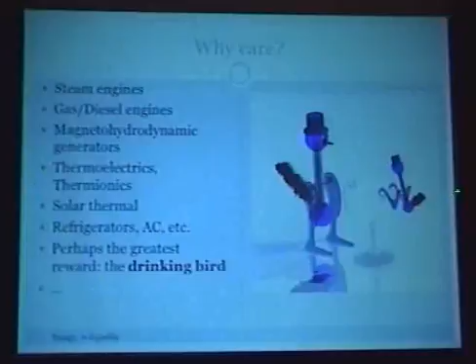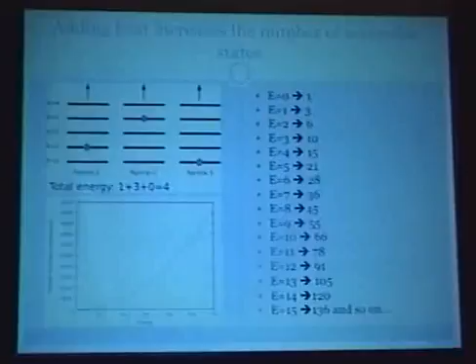For the first few slides, I'd like to review some of the physics I talked about last week and amplify on a few points, redirecting some of those toward the idea of heat engines. As you recall, last lecture I introduced this system of three particles, each with a quantized ladder of energies: 0, 1, 2, 3, 4, and so on. In this particular case, particle 1 has 1, this has 3, that has 0, so the total energy of this state is 4.

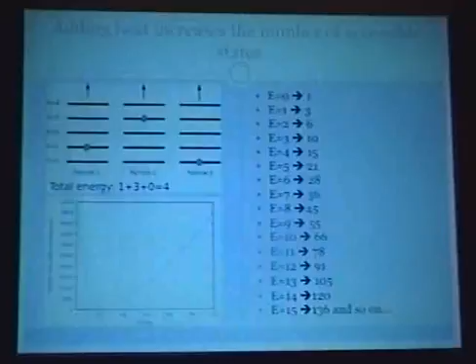Now, what we did last week was distribute different amounts of energy in the system. Recall that if we have 0 energy to distribute, there's only one way to do that, namely that all the particles have 0 energy. If you have 1 unit of energy to distribute, you can put it on particle 1, 2, or 3, so there are 3 different ways to do that. If you have 2 units of energy, there are 6 different ways to distribute it among these 3 particles.

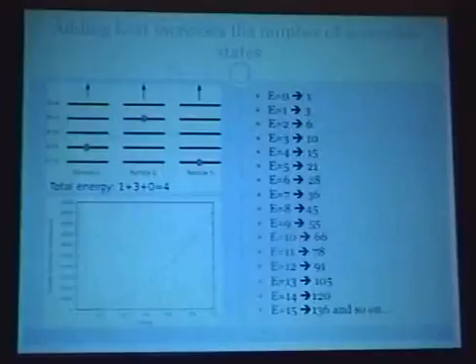You see this very rapidly increases, so that when you have 14 units of energy, you have a large number of combinations to distribute across. If you plot this up to higher energies, you see that at 200 units, you have something like 20,000 different combinations with which you can distribute the energy.

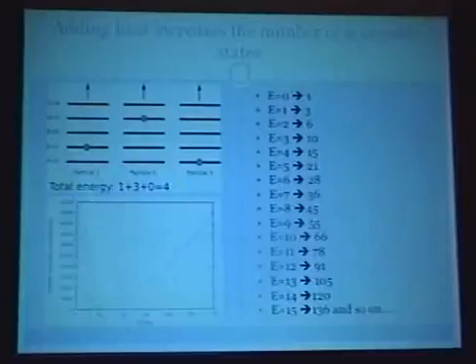So this was just 3 particles, but now imagine some of the quantities in this room, like 10 to the 23 particles in some volume of air, and macroscopic amounts of energy—you can see you're really dealing with a vast number of combinations.

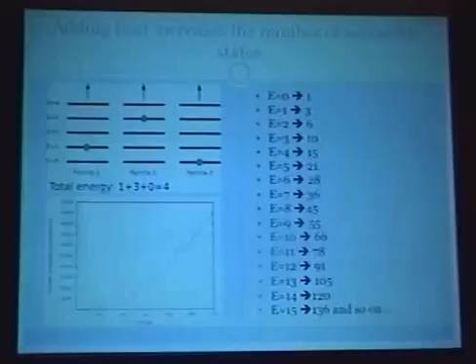So the way we count those combinations is this quantity I introduced in the last lecture, entropy, which is just a proportionality constant times the log of the number of those accessible states.

A natural question to ask: when you add energy, you increase the number of accessible states, so you're increasing the entropy of this little system. You can ask that question more generally with thermodynamic systems like a volume of air. As I explained last week, the relation between the amount of heat you add and the change in the number of accessible states is given by this proportionality constant, the temperature. So you might think of temperature as being a real thing—something feels hot, something feels cold—but it also tells you how to relate a given amount of heat over a temperature to the number of accessible states you add to a system.

This was all a little abstract, but we can think about it in a practical setting. Here we have some ice water in a hot room—the room's hot, the ice is cold. As I said last week, if you have a gradient in temperature, generically you get a current of some type, in this case a flow of heat until the two temperatures match. So you know that if water sits out long enough, its temperature will match the room's temperature.

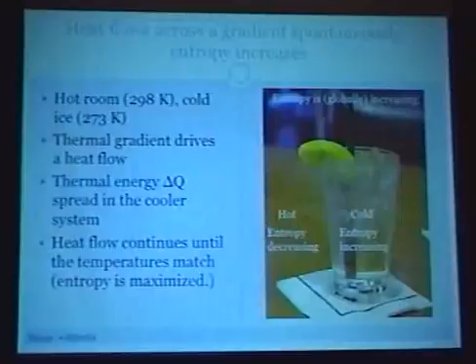And in the process, some heat delta Q has flowed from the room into the water. So we can now think about this more quantitatively in terms of that thermodynamic entropy. Recall that the change in entropy is the amount of heat you add divided by, in this case, the fixed temperature. That's a critical point, that the ice is at a fixed temperature.

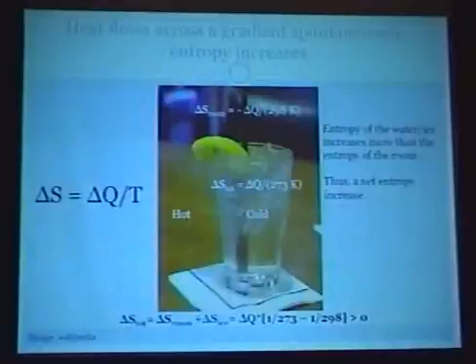So if you look at the room, if you add some delta, you're taking some heat away from the room at its temperature, so its entropy is decreasing. If you're used to thinking about entropy always increasing, this might be somewhat of a surprise, but that's because it's giving up heat.

But then, if you look at the ice water, that heat is flowing into the water at 273 Kelvin. 298 is 77 Fahrenheit, so that's like this room. 273 is 32 Fahrenheit. So the heat is flowing into the ice water, and the entropy increase there is that same amount of heat over 273.

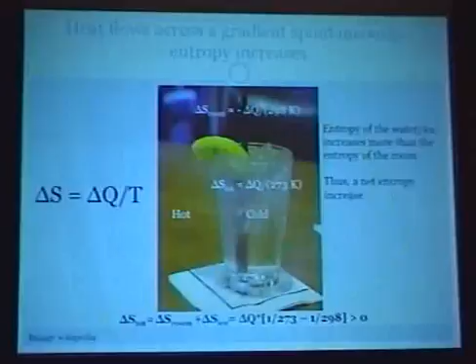So when you think about the system as a whole, the total change in entropy of the room, which is decreasing, and the total increase in entropy of the ice water - you find that because 1 over 273 is bigger than 1 over 298, the change in entropy is greater than 0. So in particular, the entropy of this universe is increasing.

So we can elevate this to a law, the entropy statement of the second law of thermodynamics, which says that in a spontaneous process, entropy is increasing. The schematic here is just like what I showed: if you have hot and cold, heat will flow between them. Entropy will increase until it reaches a maximum, and then you're at some thermal equilibrium, and nothing happens.

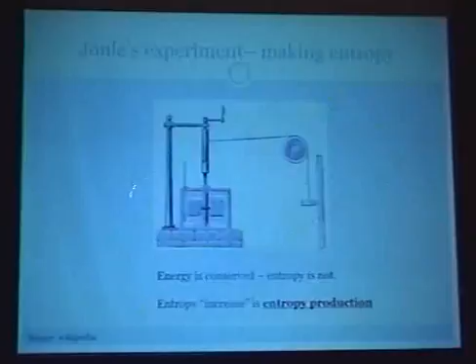So this slide highlights an important difference between those. Going back to Joule's apparatus, he showed that the potential energy embodied in this mass when it falls is converted into heat in the water in these paddles, so that the energy is conserved. The mechanical energy of this falling mass is converted wholly into heat energy.

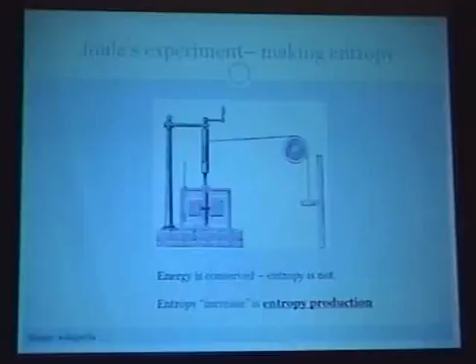But the critical point here is that the entropy is not conserved. In the view of entropy, you're adding heat to this water, so you're increasing the entropy in this volume. So while momentum and energy are conserved, entropy, even though it's a property of the stuff, is not.

And when the second law says it's increasing, perhaps a better verb for that is production. That is, when you add heat to something, you're producing entropy.

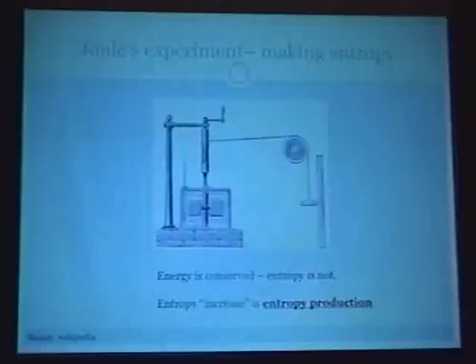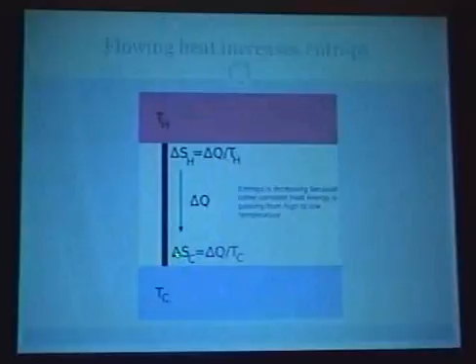So if we think about the ice water in the room a little bit more abstractly: here's the hot room, some T hot, and here's the cold ice water, T cold. There's some heat flowing through the glass, in this case represented by this rod. There's some change in entropy of the room, which is the heat over the temperature of the room, and there's some change of entropy of the ice water, which is the heat over the temperature of the ice water.

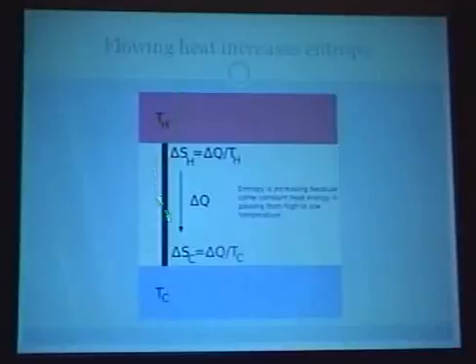Now, the second law of thermodynamics only says that entropy has to increase, but it doesn't tell you how quickly or to what extent. So, in particular, you might imagine that you could siphon off some of this heat and do some useful work with it in such a way that the entropy of the whole system still increases, but just less than in this particular case. That's the basic idea of a heat engine.

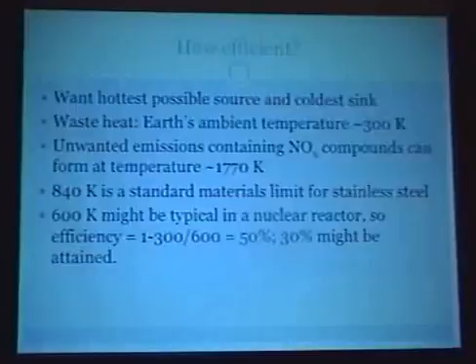Oh, you will? So I just want to drive home the point about these heat engines. We can elevate these observations to another form of the second law of thermodynamics, which says that a cyclic engine cannot convert thermal energy into mechanical energy unless the device uses two temperatures and discards heat to the cold side. In particular, it can't be 100% efficient.

Another aspect of this is that the fact that entropy has to increase puts an upper bound on how efficient that engine can be. So the picture to have in your head is that you can have something like this, where heat flows through some engine to produce work, going up the cold side.

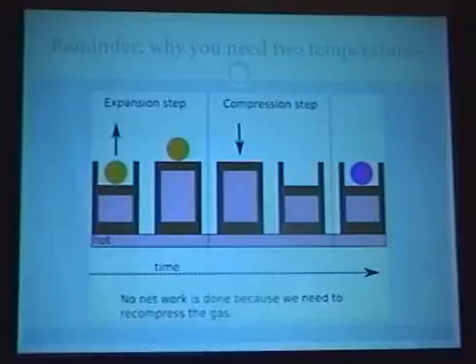But you can't just take heat from a hot side and produce mechanical work with it. So I just want to review a slide related to what I talked about last week, which reminds you why it is that you have to have two temperatures. So if you just had one temperature, let's think about this system.

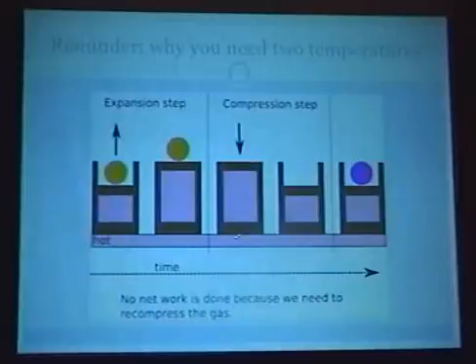You have a cylinder, a piston, and a mass. The idea is that you have this hot plate and heat is flowing in isothermally, causing this piston to rise and doing useful mechanical work. But the point was, if you want to continue to do work, you have to reset this piston back down and then put a new ball on, like we do over here.

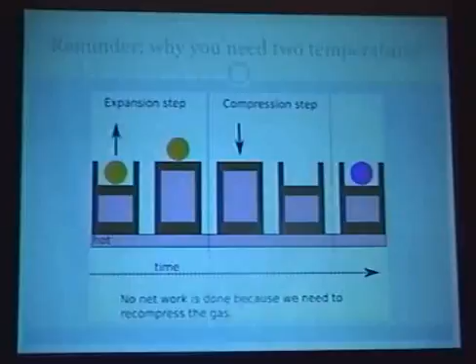If you only have one temperature, you'd find that to recompress that gas at the same temperature would take the same amount of work you just got out of it. So if you ran this as a cycle, you wouldn't get any net mechanical work. The idea is you really need to have two temperatures, and then compress at the lower temperature.

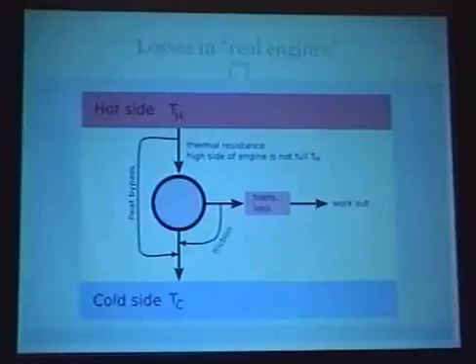Obviously, if you make mechanical work here, like turning some axle, you can have friction, and that friction is dissipated as heat, which again just flows to the cold side. That's entropy that you're producing, so again you're losing efficiency.

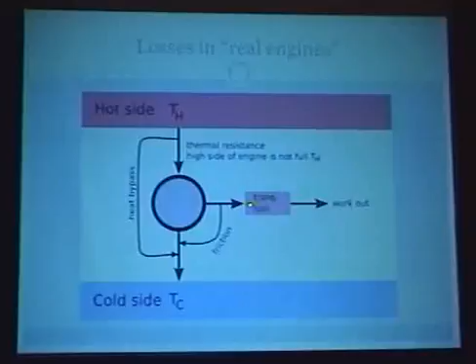You can also have things like thermal resistance, so that the temperature on the hot side of this engine is actually less than the heat exchange you're able to access, and that reduces the efficiency. You also have things like transmitting the mechanical power, mechanical losses, and eventually you get some work out. So you can see why that nuclear reactor wasn't able to achieve its 50% Carnot efficiency, but instead achieved more like 30%.

If you operate between two temperatures, a common type of engine is a jet turbine, which likes a very hot high-side temperature, and it rejects gas at still very high temperatures. The jet engine likes to work in a high regime, whereas a steam turbine might like more intermediate temperatures and reject to something like river water, room temperature.

So the idea is that even if these engines are restricted between two temperatures, you can combine two of them in a scheme where the rejected heat from one flows into a lower temperature engine, and you can exploit a much wider temperature change.

If you're interested in more discussion and some derivation, I put more technical detail in the notes. But the upshot is that there's a total efficiency for this combined cycle, which is the efficiency of the top guy plus the efficiency of the bottom one, minus the product of the two.

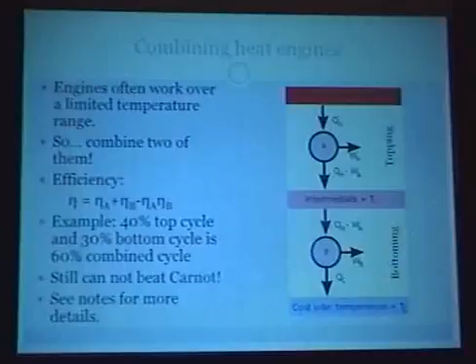To put some numbers to this: if the top guy is 40% efficient, which is pretty typical for a gas turbine, and the bottom guy is 30% efficient, then when you plug those numbers in, you find that this combined cycle can reach 60% efficiency. So combining these things is really a very reasonable thing to do.

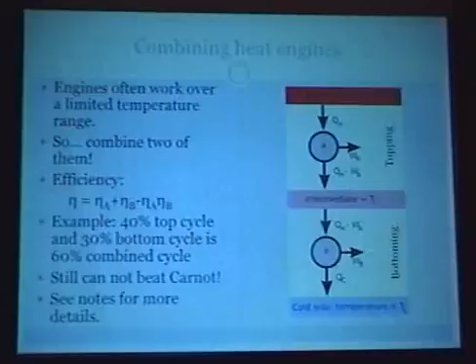You might think this sounds so good that you could possibly beat Carnot's efficiency. But it's still the case that if you could build an engine from this hot temperature to this cold temperature, the Carnot efficiency would be the highest you could achieve. So even if you combine a bunch of these motors and get the impression you're getting a better deal, you still can't beat Carnot. There's more discussion of that in the notes.

Here's a typical engine you might use in one of these plants: 330 megawatts, and it's about 40% efficient, as I mentioned. This is the jet engine that turns the generator, just like the generator we talked about in the second and third lectures. Then the heat you reject can be used in a secondary steam cycle, again just like the generators I talked about in the second lecture.

You see that the hot side of this jet turbine is quite high, and the steam turbine is the one that starts out at this rejected heat.

There are also more exotic schemes that use magnetohydrodynamic generators as the topping cycle and steam as the bottoming cycle. I think this type of thing is a really neat idea.

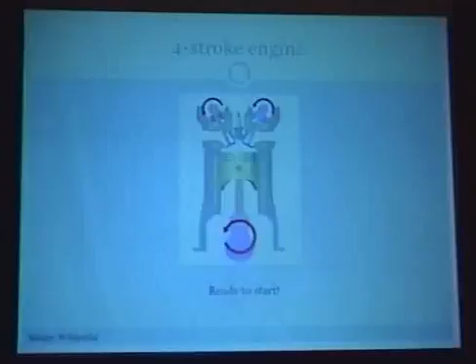For the rest of the lecture, I'm going to move on to transportation engines and statistics about transportation. Let's go through the steps of how a standard gasoline engine works. So it's ready to start.

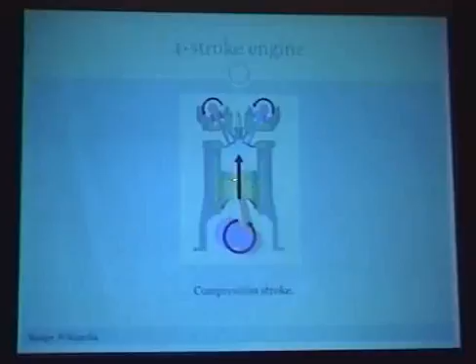In the first intake stroke, this valve opens and an air-fuel mixture is introduced by pulling the piston down into the cylinder - this is called the intake stroke. Then as this continues to turn and drives the piston back up, this valve closes and compresses that air-fuel mixture - this is called the compression stroke.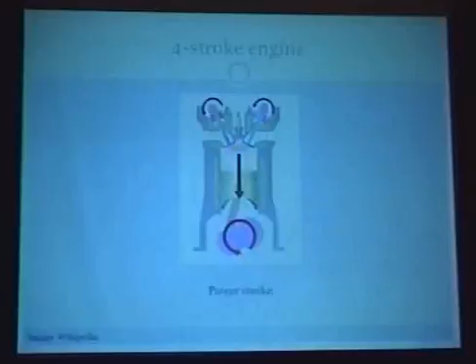Now it'll reach this top point, and that's as high as this piston will go, and the spark plug ignites that pressurized mixture. The pressure very rapidly rises at sort of a constant volume. And you can imagine what happens next: you get the so-called power stroke, and that drives the piston back down.

This is the one that you exploit with the car. Then in a final stroke, the piston rises again, but this valve opens and lets the exhaust escape.

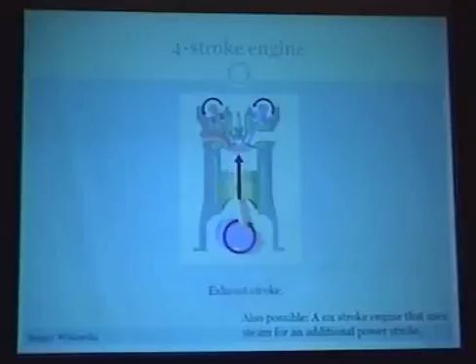An audience member pointed out last week that you can also think about six-stroke engines. I won't, because of time, have a lot to say about that, but the basic idea is that you can use steam as an additional stroke here and exploit the remaining heat.

Let's just call that quantity R. I have more of a derivation in the notes if you'd like to see the technical details, but you find that in an idealized treatment of this Otto engine, the efficiency is 1 minus the compression ratio to this neat factor, gamma, which is called the adiabatic index of the gas.

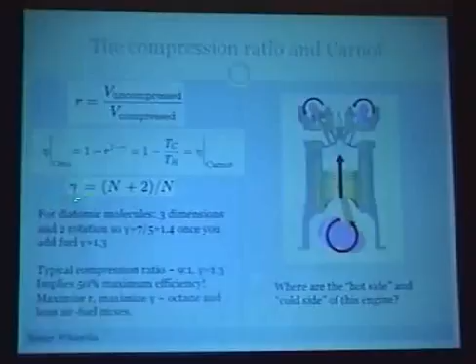Now, to go into why that's the case, it's pretty subtle, but what the adiabatic index is, is the number of degrees of freedom in a gas plus 2, divided by the number of degrees of freedom.

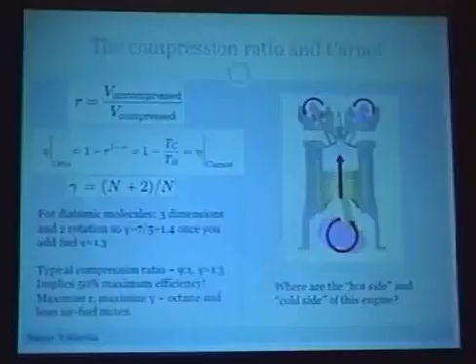So what are the degrees of freedom? If you have just one molecule or atom running around, it can move in 3 dimensions, so that's 3 degrees of freedom. If you have a molecule, it can also rotate, and to describe that you need 2 additional degrees of freedom. So a molecule like N2 or O2 can have 5 degrees of freedom.

So if you plug that into this index, you find that the index is 1.4, or 7/5. Now once you add fuel, you lower that index by increasing the number of degrees of freedom to something more like 1.3.

So now we can estimate how efficient some real engines are. A typical compression ratio in a modern engine might be something like 9 to 1, although that can vary, and the adiabatic index might be something like 1.3. If you plug that into this equation, there's the compression ratio, there's the adiabatic index, you find that implies you can reach something about like 50% efficiency.

So it turns out that this compression ratio is really a good proxy. If you work out the details, it's a good proxy for a cold to hot side temperature ratio, which does reach the Carnot limit. So when people talk about compression ratio, it's really kind of a proxy for what people talk about in other engines with these temperature ratios.

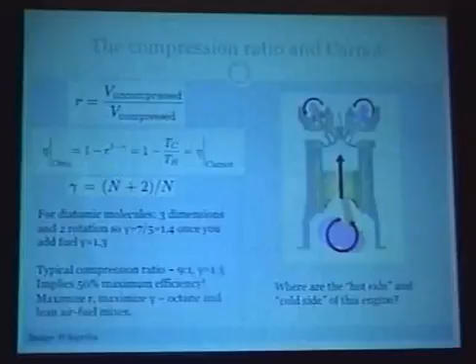So if you want to maximize the efficiency, what do you do? Well, you want this compression ratio to be as big as possible, and you want the adiabatic index to be as big as possible.

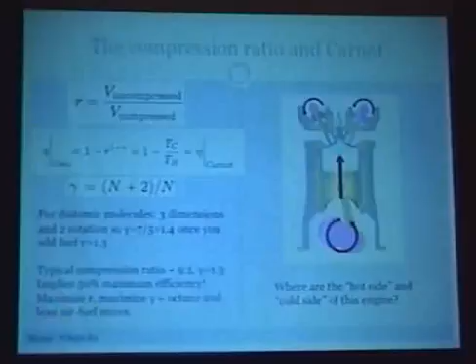So the way you maximize the compression ratio is to compress the gas more. But to do that, you need to have a higher octane air-fuel mixture, because the octane is what determines how much you can compress the gas before it spontaneously ignites. You really want that gas to ignite with a spark plug in sync with the engine rather than spontaneously. So having a high octane allows you to have a good compression ratio.

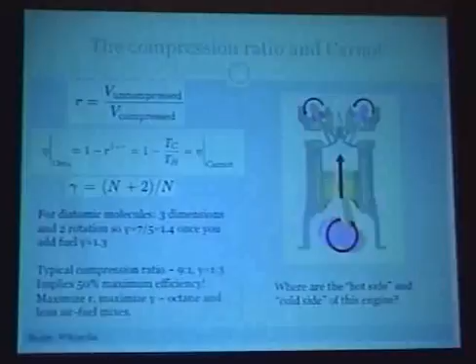To maximize the adiabatic index, one thing you can do is have a lean air-fuel mixture. That is, you can have more air than fuel, and it brings you closer to this 1.4 adiabatic index compared to 1.3.

Okay, so I think now we have a pretty good sense of the efficiencies of some real engines and the terms that go into them. We can do a kind of back-of-the-envelope calculation to try to anticipate, say, what the fuel economy of a real car is. How can we understand our real cars?

So to think about that, let's think about a really simple and stupid car, which is a sphere. And this is my other car.

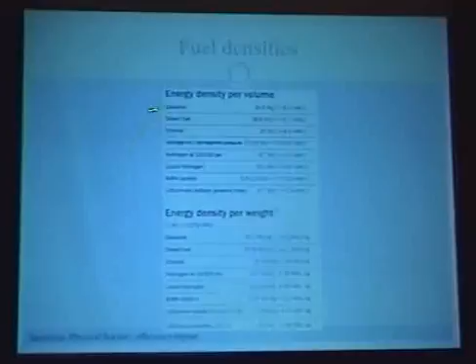So first let's think of how we want to power the sphere. Well, what are the options? You can use the gasoline engine, the diesel engine, ethanol, hydrogen, nickel metal hydride batteries, lithium-ion batteries.

And you'll note here, sorry this is a little bit small if it's hard to read, that the energy density of gasoline is really one of the highest, at about 35 megajoules per liter. If you compare that to current batteries, you see that batteries really embody much less energy.

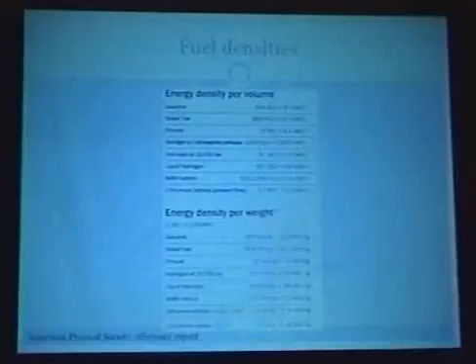So for this car, let's be a little bit old-fashioned and use a gasoline engine. This table was from the American Physical Society report, and there's really good discussion of future batteries and improvements.

Okay, so just to put that in another set of units that might be more convenient, imperial units, gasoline embodies 114 BTU per gallon, 114,000 BTU per gallon. Recall that a BTU is the amount of heat required to raise a pound of water one degree Fahrenheit.

Okay, so the first thing we want to calculate is how much power an engine produces, its primary power. So if you know how many BTUs per gallon, and you know how many miles per gallon your fuel economy is, you can find how many BTUs per mile your car needs to move you. If you know how fast you're going, that is, how many miles per hour, you can find how much energy per time, like joules per time, your car needs to move you at a given speed.

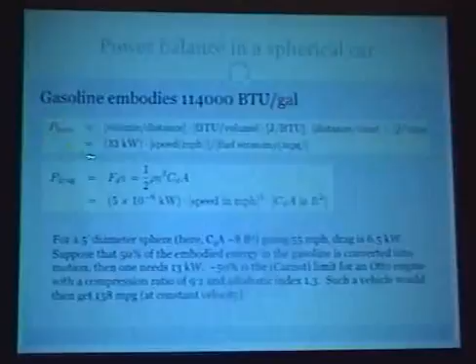And just to put some numbers to that, that burn rate power is about 33 kilowatts times your speed in miles per hour, divided by the fuel economy. So if you're going 55 miles per hour in a car that gets 30 miles per gallon, this comes out to about 60 kilowatts. So that's about 1,000 60-watt light bulbs. It's really a significant amount of heat energy.

So where's that energy going? Well, obviously it's going into the motion of the car somehow. Why do you need power to make a car move? Well, obviously to accelerate it, but also once it's moving, you're subject to drag from the rolling resistance in the tires, and you're subject to drag from the air.

So for the spherical car, let's just say we only have drag from the air. The sphere is trying to move through the air, and there's some drag term. From the lecture on the wind, we reasoned that the drag force from wind blowing on some surface scales as the density of the air times the velocity squared, times the coefficient of drag, times the area. But when you want the power, you multiply by the velocity, so the power from drag of moving the sphere through the air scales as the velocity cubed.

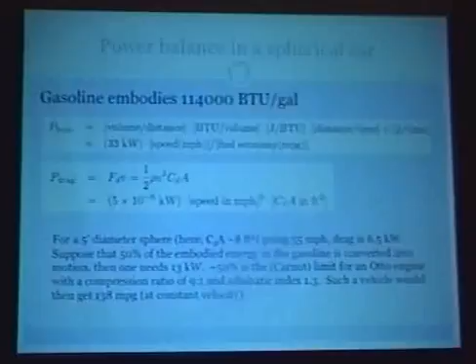So to put some numbers to that, this is 5 times 10 to the minus 6 kilowatts times the speed cubed times the drag coefficient times the area, in units of feet squared. These are just convenient imperial units.

So for our spherical car, let's say it's 5 feet in diameter, maybe that's big enough to ride in. The drag coefficient times the area of the sphere is 8 square feet. And if you go 55 miles per hour, that drag formula tells you the power you need is about 7 kilowatts.

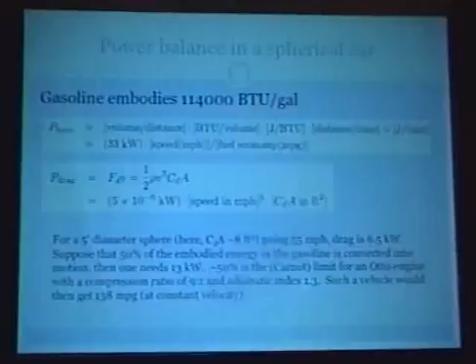As we learned from the previous slide, the maximum efficiency you might reach in a practical engine is about 50%, taking a compression ratio of 9 to 1 and an adiabatic index of 1.3. If you're 50% efficient, you need 13 kilowatts. If that's your power burn rate, and you want to go 55 miles per hour, you can solve for your fuel economy, and you find that this particular car gets 138 miles per gallon.

And this is ideal for two reasons. One is that we're at the Carnot limit, and the second is that we're only assuming there's drag, and you're just moving the car against drag. So let's think about a real car.

In a real car, you have 100% of the primary energy coming in, and these are the sorts of engine losses I've been talking about. But in addition, you have to have an alternator, a fan, pumps, and so on, so you lose about 62% of your energy, and a lot of that goes into standby and idling. So the amount of practical energy that goes to the drivetrain is about 18% of the primary input. In the drivetrain, you lose about 6%, so about 12% of the primary energy gets to the actual tires.

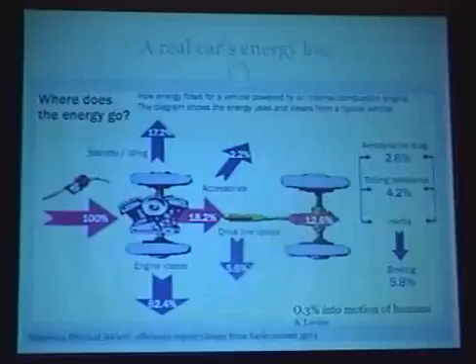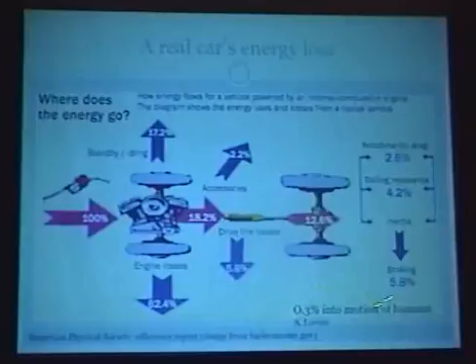So how's it used once it gets to the tires? Well, only about 3% of that pushes against drag. About 4% is pushing against the rolling resistance of the tires. And the rest can be used to accelerate the vehicle's inertia. And obviously, if you ever want to stop the vehicle, that energy has to go into the brakes. So about 6% of it actually goes into motion.

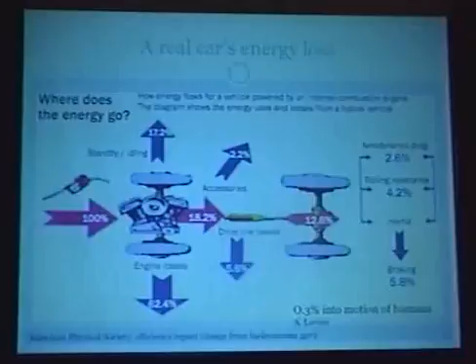And Amory Lovins, who was here to give a talk last week, made the interesting point that if you think about not accelerating the car, but just accelerating the humans in the car, the fraction of the embodied energy that goes into accelerating humans is really quite a bit smaller.

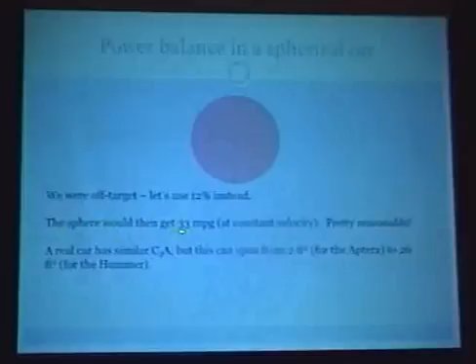So we were kind of off target by saying our spherical car gets 50% efficiency, so let's use 12% instead, just to put a number to it. If you plug in 12%, you find that our sphere, instead of getting 138 miles per gallon, gets 33 miles per gallon, and you see that that's pretty reasonable. So with a pretty simple argument, we've reasoned through why cars get the sort of mileage that they do. But of course, a factor in this was the drag coefficient.

And for us, that was 8 square feet. But some of the best cars are 2 square feet, because they're very aerodynamic. And the sizes go up to, say, 26 square feet. So that's something that varies a lot with cars.

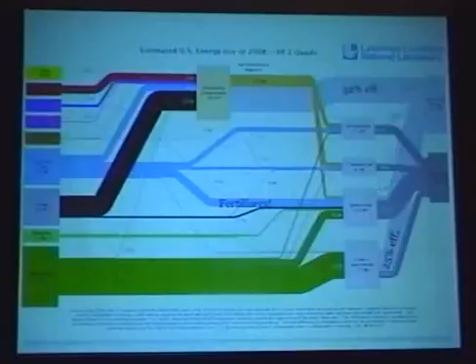The units in this flow chart from Livermore are in quads, that is a quadrillion, 10 to the 15 BTU. So the annual energy we used in the U.S. in 2008 was 100 quadrillion BTU.

Recall that a BTU is about a kilojoule, and a joule is what it takes to lift an apple about a meter. So you see that 100 times 10 to the 15, times 1,000 - that's really a remarkable amount of energy.

As some rules of thumb, about a third of the heat energy input into electrical generation reaches customers as electrical energy. The big factor there is the thermal loss, rather than the transmission. Another rule of thumb is that about a third of the CO2 we emit is in the transportation sector.

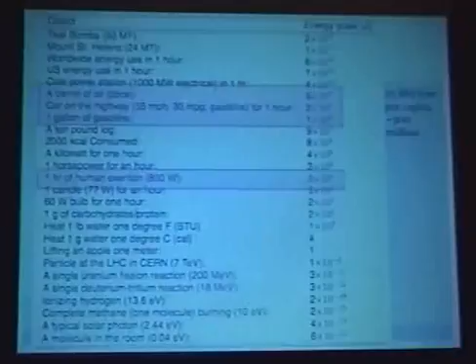It's informative to compare that to a barrel of oil, which is 6 times 10 to the 9 joules. So you see there's a difference of about a factor of 2,000.

A lot of energy just within the U.S. If you then think about total energy scales in the U.S., or worldwide, in one hour, you see that those are about a factor of 10 to the 10 times the amount of energy it would take for an Olympic sprinter to be utterly exhausted. So it's really a remarkable amount of energy.

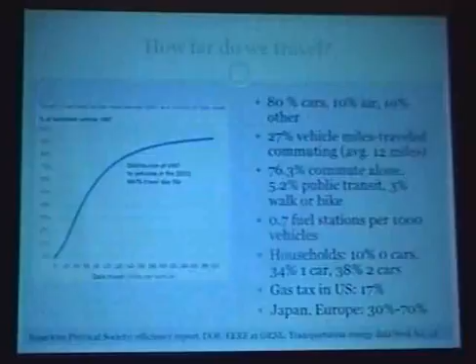Going back to cars, an interesting question is how far we drive. This is a neat plot from the American Physical Society report showing the cumulative number of miles driven. The way you read this, for example, at 80% here, that goes down to about 120 - meaning 80% of cars drive less than 120 miles in a given day. It also means 20% of those cars have driven more than that in a given day.

You can also read off, say, 20% of cars drive less than about 30 miles in a given day, meaning 80% of cars drive more than that. So it really gives you a sense of how our transit is distributed.

One thing I didn't have a good sense of going into this was what fraction of energy goes to cars versus planes. It turns out that in terms of primary energy used, about 80% goes into cars, and 10% goes into air travel, pipelines, and the like.

This is all from the Transportation Energy Data Book from Oak Ridge. The thing I was surprised by is that 27% of vehicle miles traveled are in commuting—I thought that might be a little higher—and the average commute is something like 12 miles. In their study, 76% of people commute alone, 5.2% take public transit, and 3% walk or bike. This is from a national census.

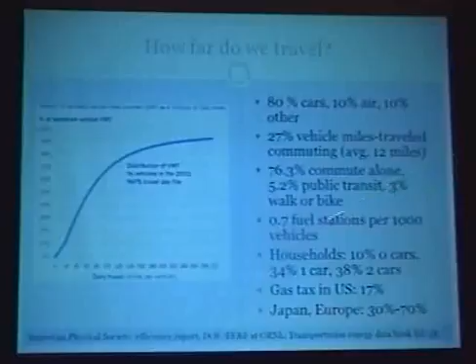One thing I really had no sense of without doing any quantitative argument was that there's about one gas station per 1,000 vehicles in the U.S. I just thought that was a neat number.

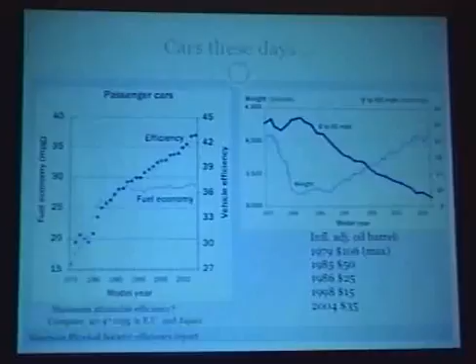If you then plot the fuel economy, you see they departed from each other around 1985. Fuel economy settled in at around 27 to 28 miles per gallon, while efficiency continued to rise. If fuel economy had continued to track efficiency, we'd have fuel economies up around 40 miles per gallon—and indeed, those are the sorts of economies reached in the EU and Japan. So why did efficiency increase so much while economy went another way?

If you look at the acceleration of cars, how fast they go from 0 to 60, and the weight of cars, you see that from the late 70s to early 80s weight dropped enormously, but since then it's been climbing back up. So cars have been getting heavier even as efficiency increased, and they've also been able to accelerate faster. This means we have more power and heavier cars, so we're not fully exploiting these gains in efficiency.

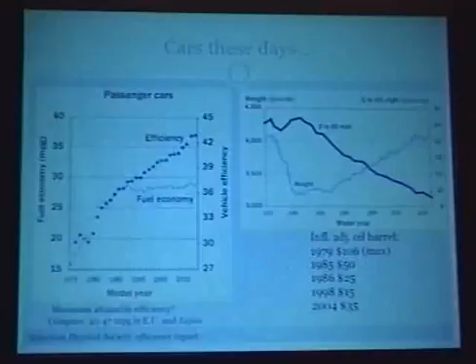I'm sure there are many factors, but one thing that weighs into this is the cost of oil during this period. In 1979, the inflation-adjusted cost per barrel was $106. By 1985 it had collapsed to about 50. That's about when fuel economy and efficiency depart and weights increase. So there was a long period of very stable, low oil prices, and that must have had some influence on our ability to make heavier cars.

So it's not just efficiency or fuel economy—a further distinction is energy intensity, that is, how many BTUs it takes to move a person one mile.

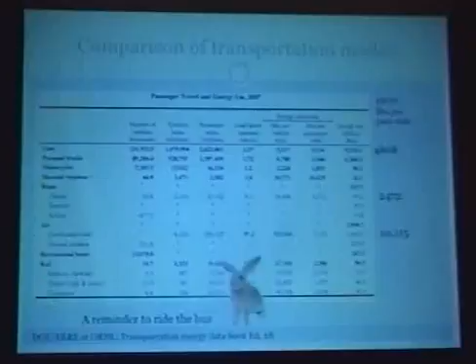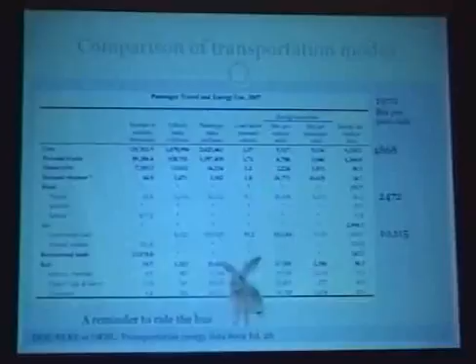This Transportation Energy Data Book has a neat census of different forms of transportation—cars, trucks, motorcycles, buses, and so on—and they find the average occupancy of these vehicles. If you sample a given car on the road, it might have about 1.6 people in it; a given transit bus might have 9 people. If you know how many people are in a vehicle and what mileage it gets, you can find how many BTUs it takes per passenger per mile. Given the occupancy of a car, they reach about 3,868 BTUs per passenger per mile.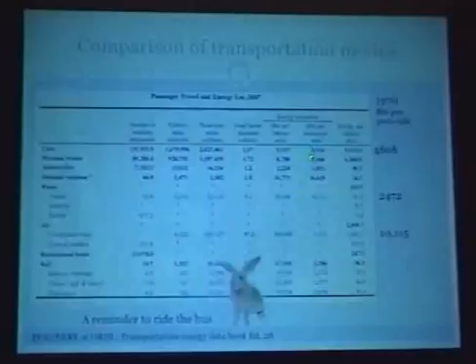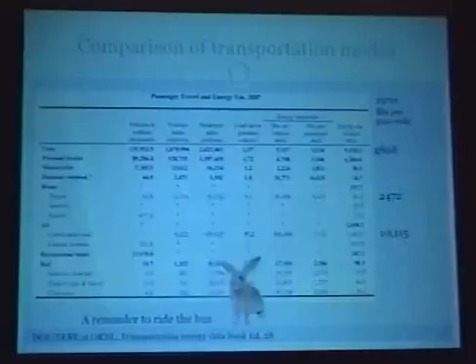In 1970, that was closer to 5,000, so there's been a real gain in the energy intensity of cars since then. One surprising thing is that buses are not that favorable compared to cars in this particular comparison, and in 1970 it was actually better. Although they don't have the occupancy statistic for 1970, I think more people rode the bus back then, so the energy intensity of that transportation was much better.

So this is a reminder that if there's a bus, it's really good to take it, because once the occupancy factor of a bus is above something like a third, it starts to beat out the energy intensity of cars.

These statistics are only for the U.S.—yeah, these are the US. If you look at Japan, the occupancy factors for buses are much, much higher and much better than cars. Yeah, the rabbit is in front, which is interesting. I was worried about that.

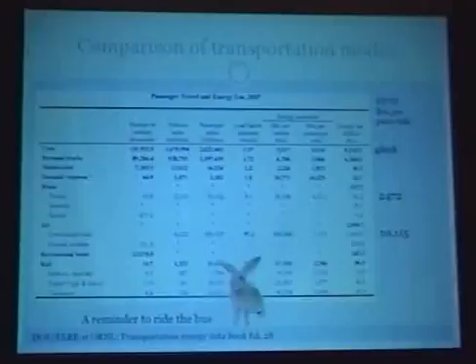That's a bit tricky too, because I don't know what the unit is, I'd have to look at the document to see what unit, like it's a real car or a... Yeah, but I was reading that rails are not that efficient when you compare with the car, anyway.

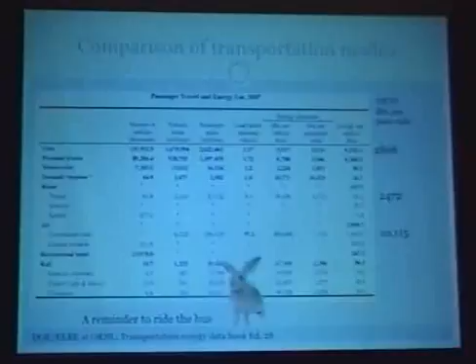Yeah, if you look in this case, Amtrak and Transit Rail do compare favorably to a car, 2,500 BTU per passenger per mile compared to 3,000. So it's favorable, but not dramatically so.

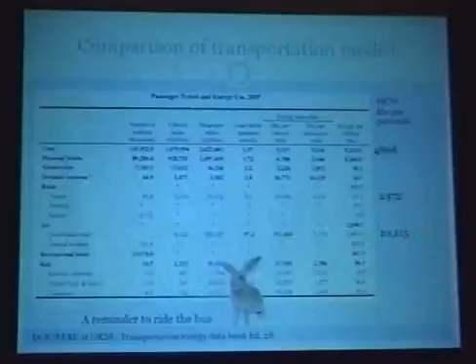One thing I think is really remarkable here is that the energy intensity of air travel since 1970 has improved remarkably. A big factor in that is that the efficiency of planes has improved since then. But a factor we're more familiar with today is that the occupancy of planes has also increased. So by packing more people on, we've made planes more efficient in BTU per passenger per mile than cars.

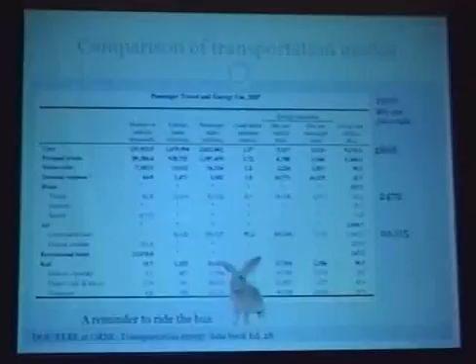That will lead to some people that will kill you—tell them that airplanes are more efficient than cars and people will kill you. Yeah, I mean, some people are really, really hard on air travel.

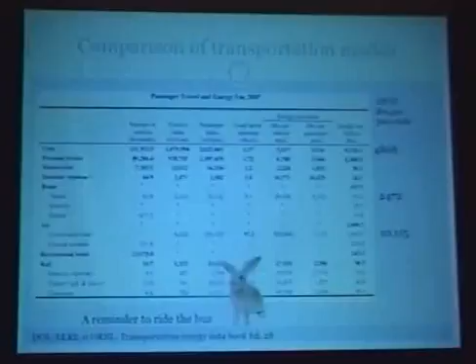Well, the thing is, though, if you think about a trip to Europe, in terms of CO2 emitted, it's as if you were to drive a car to Europe, in some sense. So, in terms of a leisurely trip to Europe, that's a significant amount of CO2, which I think most people don't realize.

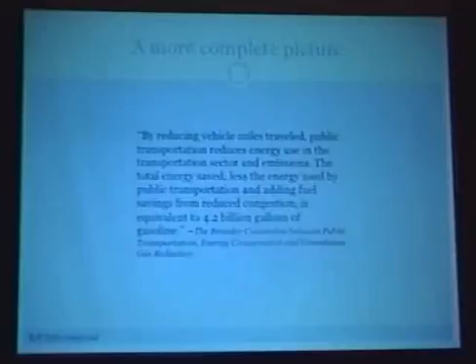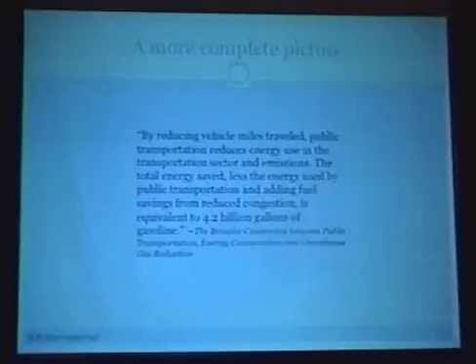This is a neat paper where they do a more holistic study and try to consider those knock-on effects of having available transit. They find that transit really saves a significant amount of gasoline per year. That's a very strong argument, even on top of some of these things about intensity—that transit is very good.

So one final fun statistic—actually two more fun statistics. This is again from this data book, which is 379 pages of fun.

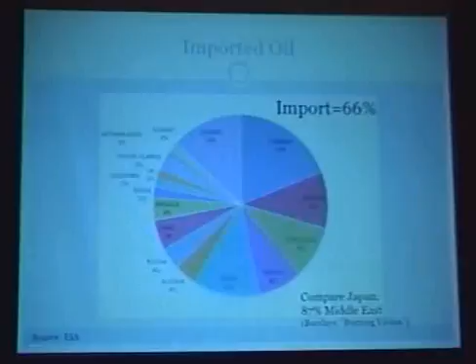You find that about 20% of it comes from Canada, 10% from Mexico, 9% from Venezuela, Nigeria, and of course Saudi Arabia is a big factor, along with Algeria, Russia, Iraq, Angola, and a large number of smaller contributors. This is from the Energy Information Administration. It's interesting that this varies a lot by country—we have a much more diverse pie than Japan, which gets about 87% of its oil from the Middle East. So it just says different things about our regions.

I'm happy to take questions.

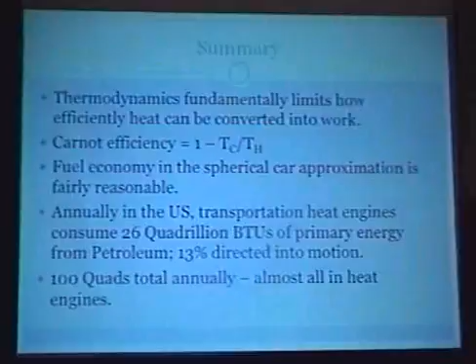How many pounds of carbon dioxide are produced by the combustion of a gallon of gas? That's a good question, I don't have the answer on top of my head. We can look it up when I come up.

And do you know what the total CO2 production of this country or the world is? I believe transportation is about 2,000 million tons this year—I'd have to look that up before confirming.

Yeah. When we hear the statistics about the U.S. being the energy hog—having a very low percentage of human population and a very high percentage of energy consumption—I'm trying to figure out where that use is greatest. Some of your statistics on transportation, for example, especially the last one, show large populations where we were 100 years ago or 70 years ago.